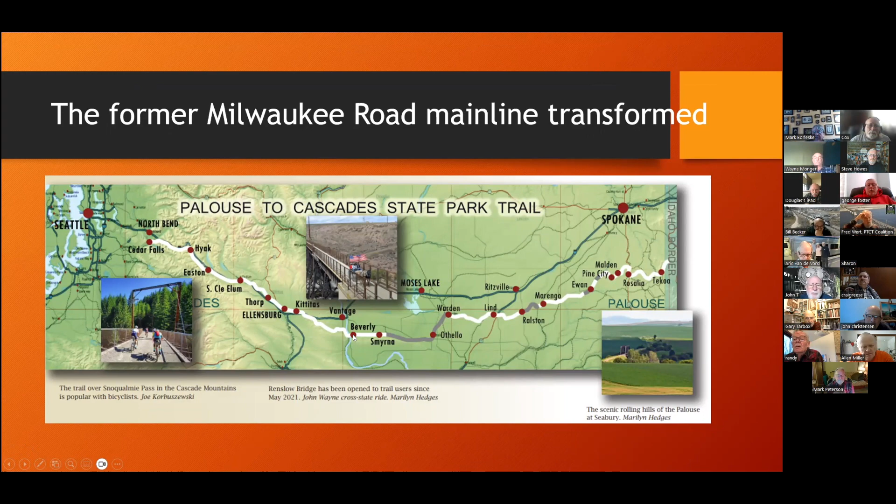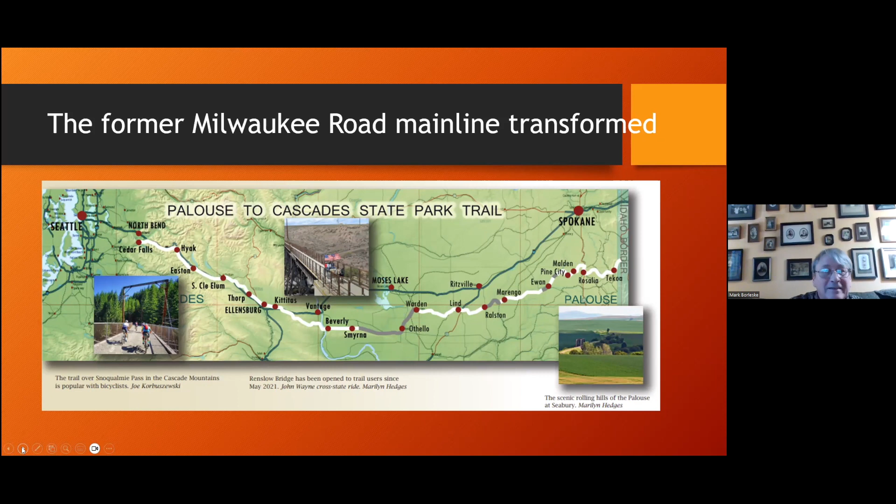Going west to east, the bridges we'll cover are the Renslow Trestle over Interstate 90, the Beverly Bridge over the Columbia River, the Concrete Arch Bridge at Rosalia in eastern Washington, and finally the Tekoa Bridge, or Tekoa Trestle, in Tekoa, Washington. We hope you'll enjoy this tour on Washington's premier cross-state route, the former Milwaukee Road main line.

Our first bridge is Renslow. The unique thing was it was a wooden bridge. It was replaced by a steel bridge shortly after the route was opened. The Milwaukee Road opened through here in 1909 as part of the Pacific Coast Extension, and after this wooden bridge was put in place, it was replaced by steel girders as a permanent bridge that exists today, done in 1910.

As you can see, they're putting girders in under load from the wooden trestle. It's amazing that the railroad was in operation while they were putting these steel girders in. Railroaders often talk about track and time, meaning the maintenance and engineering people getting the right to shut down the track for hours or even a day. This was happening while the railroad was in operation.

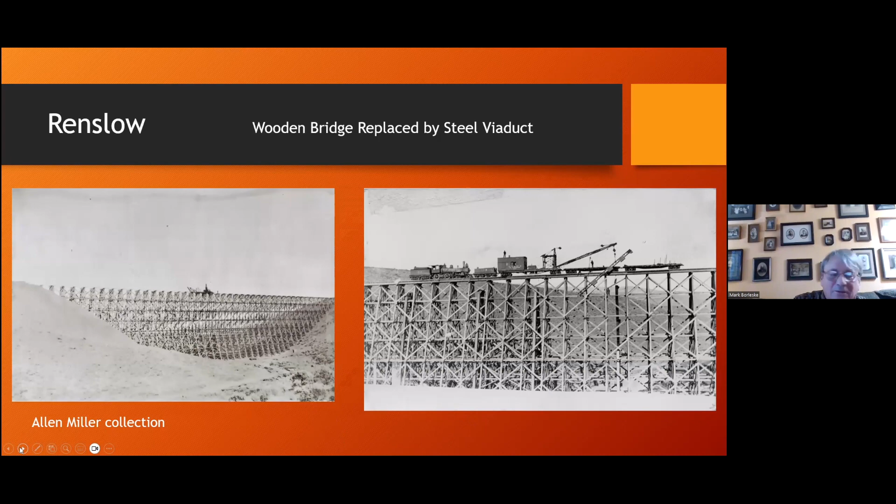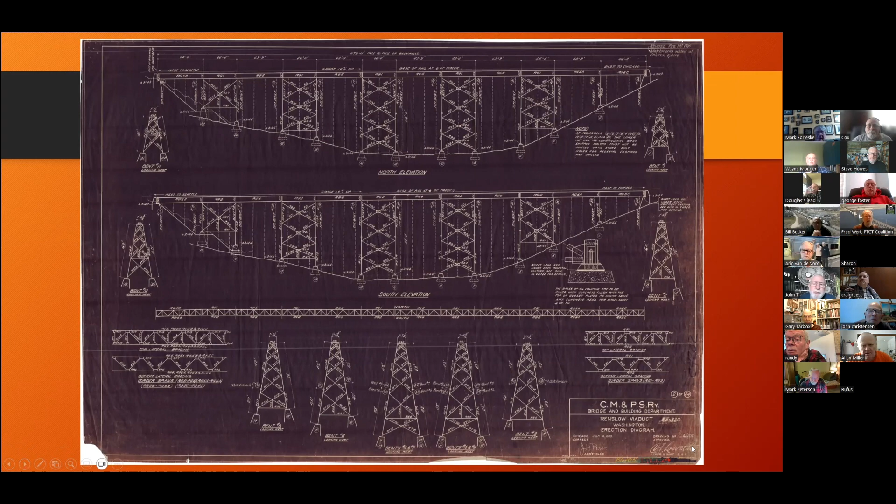This is an example of the plans for this bridge. Intricate steelwork, obviously well engineered and well designed through their engineering department, with a lot of documentation, as you can see in the lower corner. It's the Chicago, Milwaukee, and Puget Sound Railway, a subsidiary of the Milwaukee Road that was in place on the Pacific Coast Extension during the construction era and the early days of the Milwaukee operation.

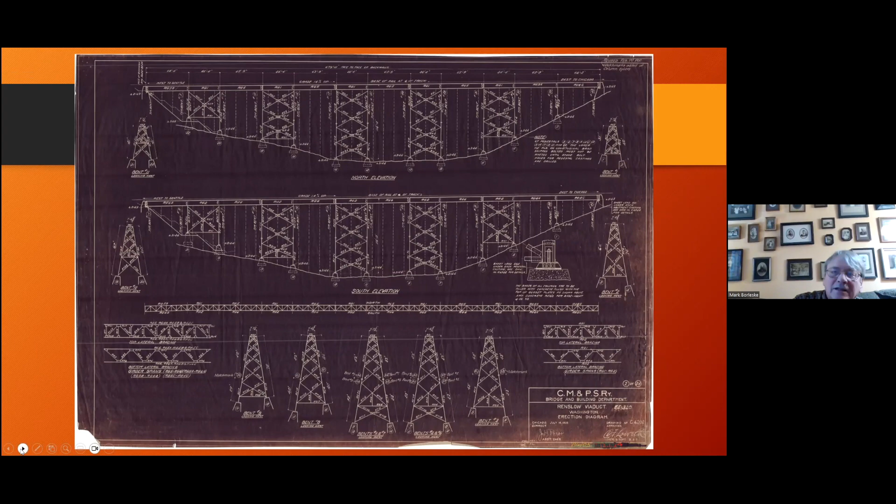The Olympian Hiawatha crossed through this route, and this is just one glimpse from the Ainsworth collection, showing a dome car, a skytop, and a skytop lounge.

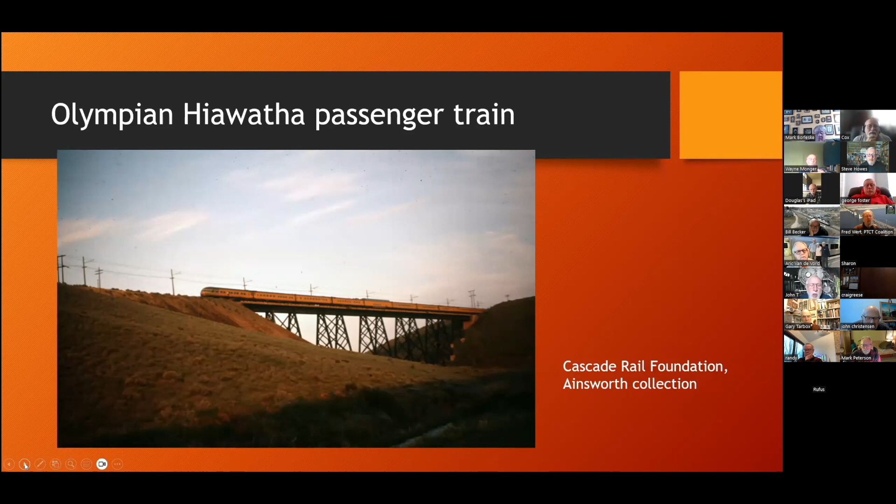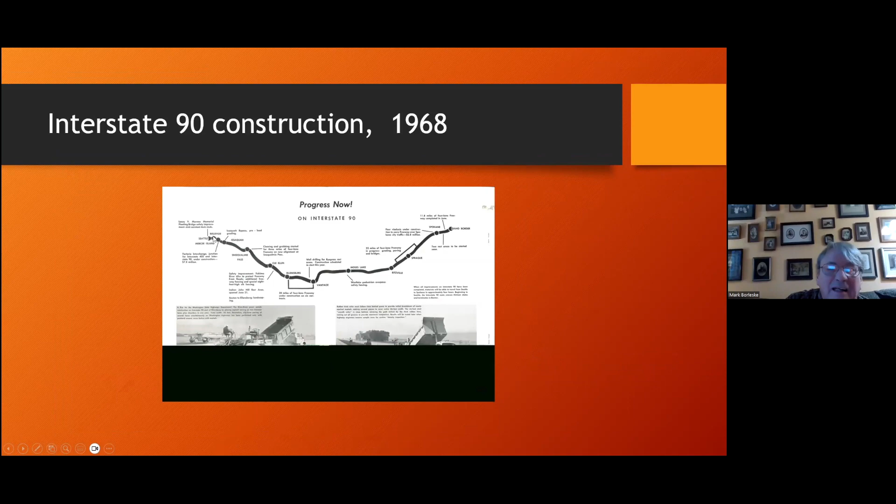In 1968, the interstate was under construction in various places between Seattle and the Idaho border, and right now the Renslow Bridge is in this area between Ellensburg and Vantage.

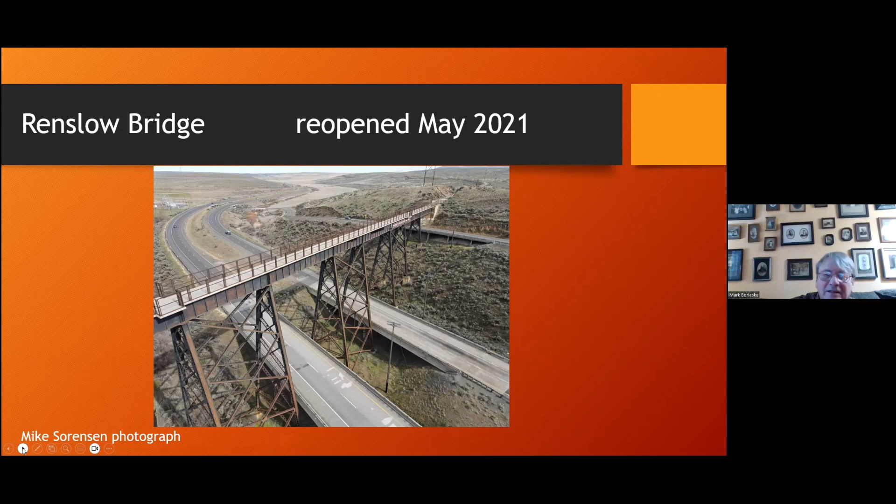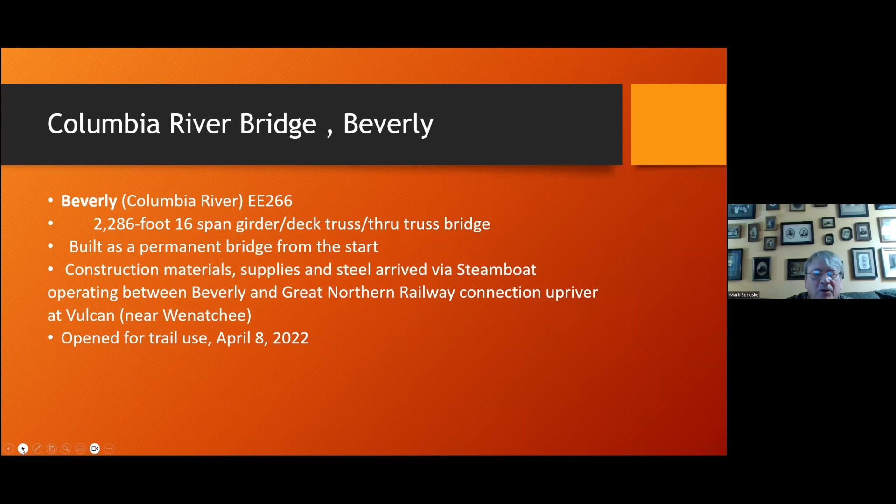This bridge was built well in advance of the railroad railhead reaching this location, because of the years involved in making it, from 1906 to 1909. So material came by steamboat to this location. It came out from, a lot of the steel came from Pennsylvania, and was transferred at a place called Vulcan on the Great Northern Railroad near Rock Island and Wenatchee, their crossing of the Columbia River, and brought down to the site.

The construction was, this was a remote place. Construction was kind of difficult. Weather was a big factor. The winds down the Columbia River at Beverly are pretty legendary, and there were all sorts of factors, both its location and the environmental and weather and climate considerations, making this a difficult place to work. But it got done, and it was just a major engineering feat.

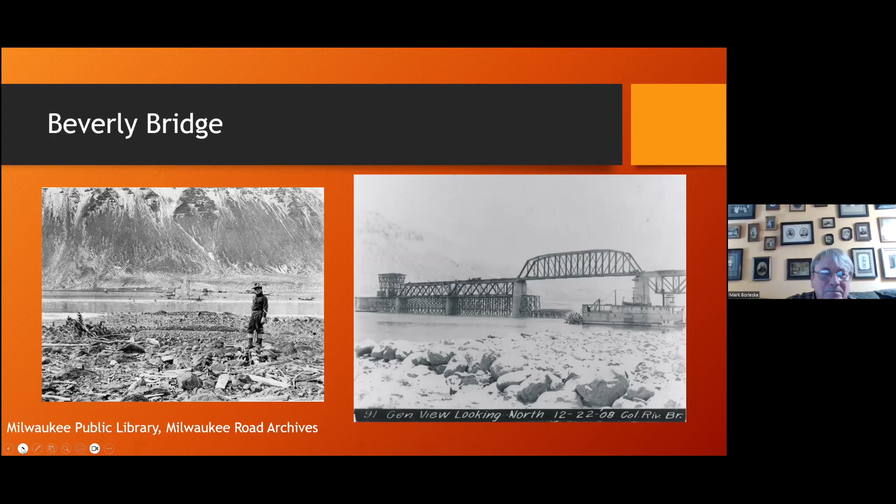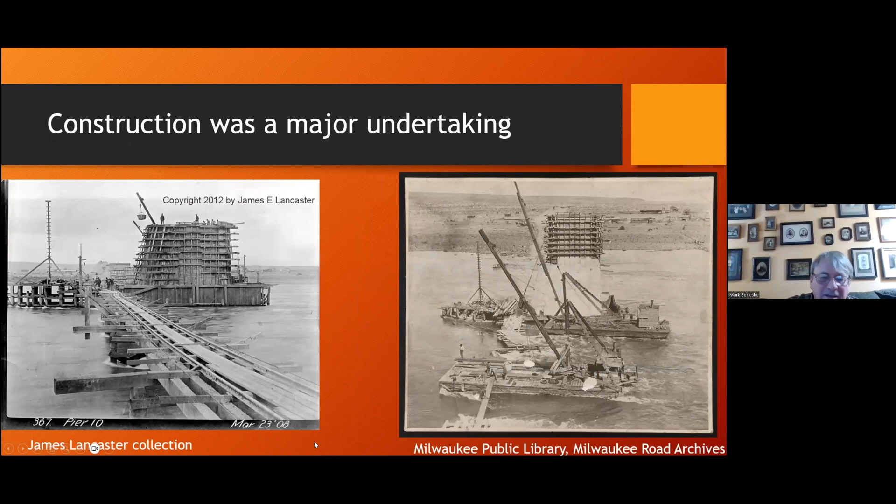The construction of this bridge was done with a lot of false work. The Columbia River's depth was not a major factor, but they used a lot of forms and false work to create coffer dams for pouring concrete and to create the masonry piers.

Once the masonry piers were in place, they did a lot of steel work to span the bridge. This is the one through span apparently on this bridge.

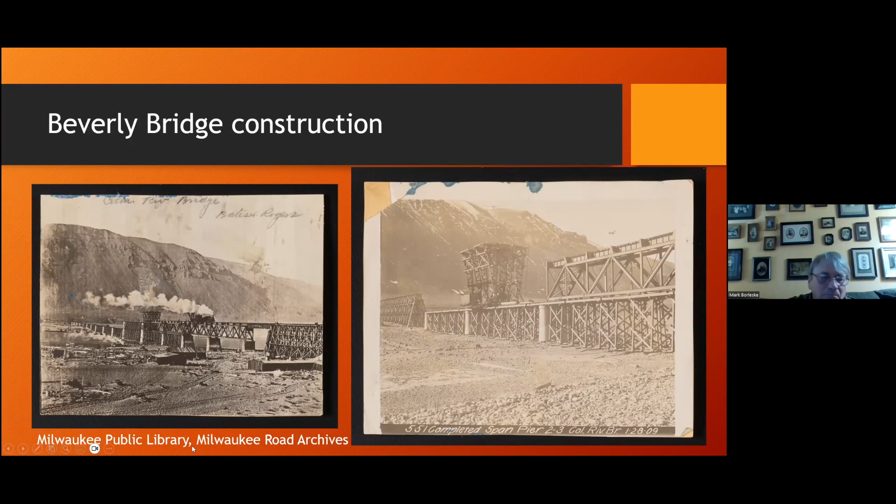This is what we believe is an Asahel Curtis photo, a pastoral scene after the bridge is in place. It's before electrification, so before 1920, and it captures a very pleasant pastoral scene in what is a pretty dramatic location with the Saddle Mountains in the background.

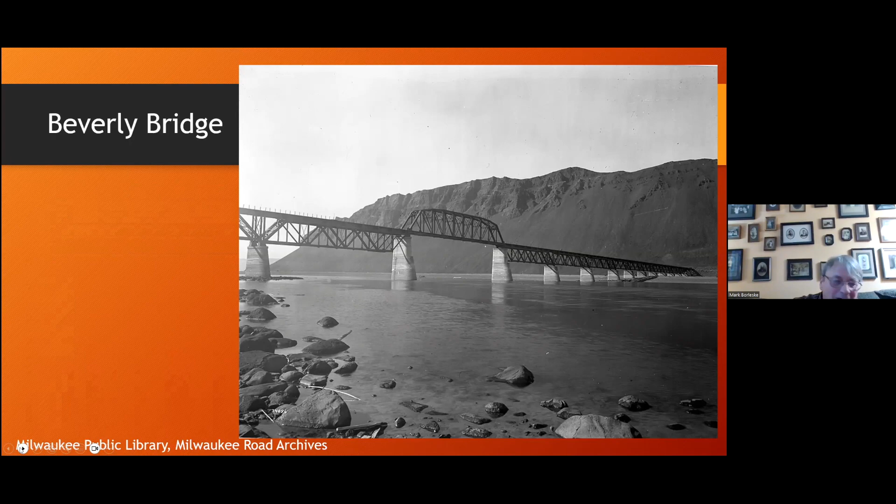The Beverly Bridge, as I mentioned, was electrified from 1920 to the early 70s. Electric trains ran across this bridge between Seattle, Tacoma, and Othello, and it was very efficient and useful for getting across the Saddle Mountain grades.

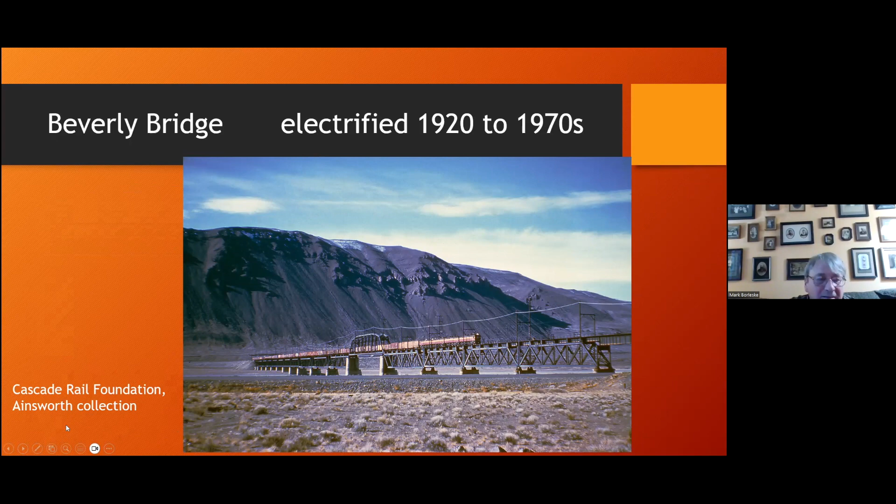One story from Harold Rasmussen, a section foreman who lived at Beverly, was that he saw a train with a piggyback trailer that had blown off a flat car. He called it in to Tacoma to the dispatcher and said a piggyback trailer just blew off the train, and he was chided and told, 'You don't know what you're talking about, that didn't happen.' Then imagine how many hours it takes for the train to go from Beverly to Tacoma.

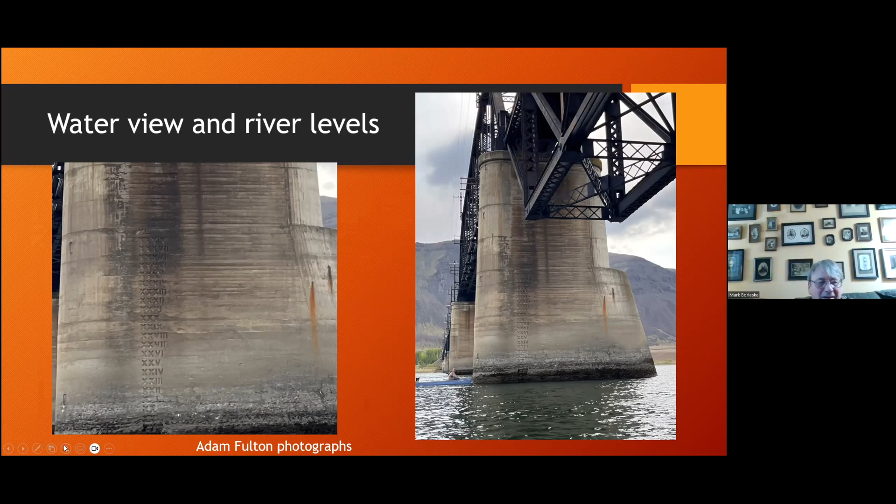This is something that came up during the construction. I didn't realize this was happening, but they actually have watermarks showing the different levels of water embedded in Roman numerals on the concrete piers of the bridge. This was taken by project engineer Adam Fulton during the decking and rehabilitation of the Beverly Bridge.

Beverly served as a helper location for trains up the Saddle Mountains, and it had a small depot. It was a wind-blown little outpost. Some people really thought it was a hardship posting out here, and it was just a small community on the banks of the Columbia River.

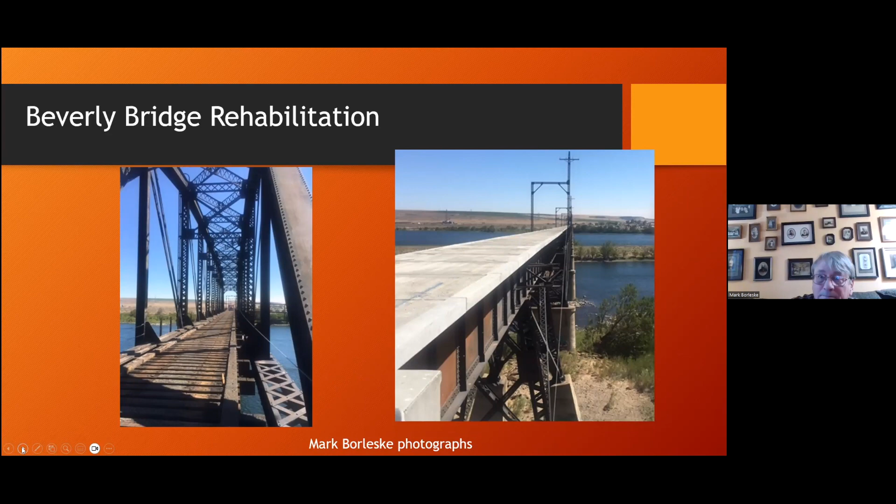Finally, the Beverly Bridge was opened on April 8th, 2022 with great fanfare. We had marching bands and trail users and a number of dignitaries, including Governor Inslee and members of various communities representing this connection of a cross-state route.

The Beverly Bridge continues to serve its purpose as a transportation role, a connector from the east side to the west side, and once again, it's massive engineering, and it continues to serve us. Unfortunately, there's not a railroad on it, but it is absolutely fortunate that we are able to retain this bridge and be able to use it.

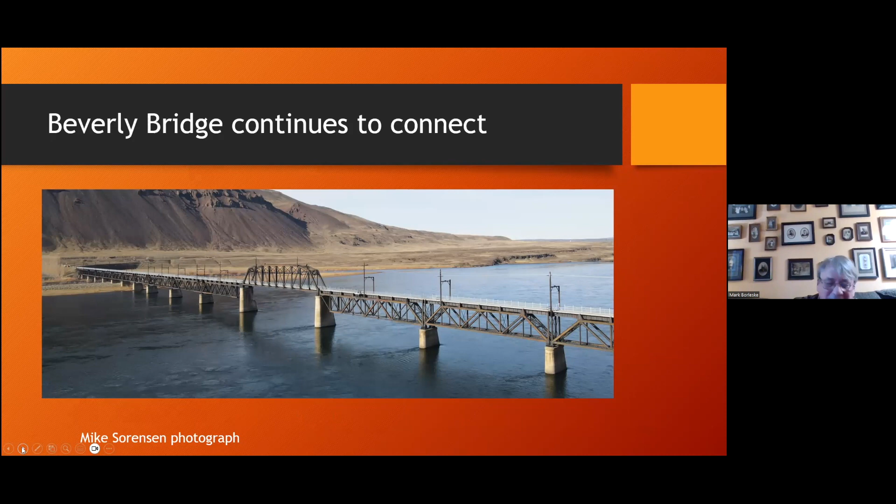Just some kind of personal notes: crossing this bridge is an exhilarating experience. You can cross it from either the Beverly Junction side or the Beverly trailhead.

Next, we travel well over 100 miles and go from Beverly into eastern Washington, across the channeled scablands, into the Palouse. This is the Rosalia Concrete Arch Bridges, which cross a valley carved out by Pine Creek, just south of Rosalia. We cross a former interurban line, as well as an active rail line that was operated by the Northern Pacific in its day, known as the Palouse and Lewiston branch.

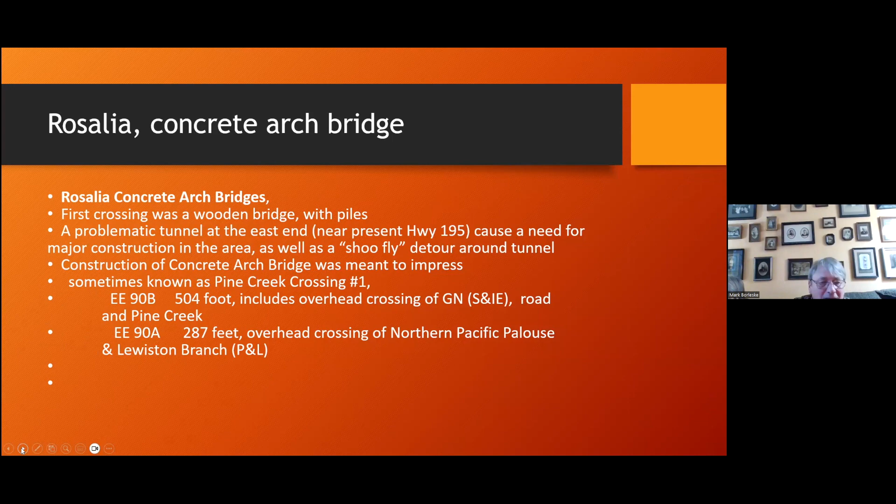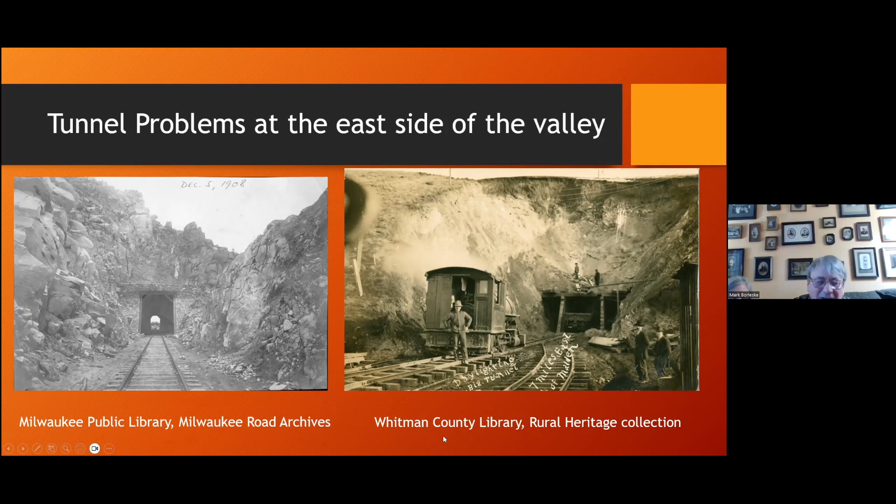The railroad had some difficulty with the tunnel on the east side of the bridge. They went through a hill, and this tunnel was very unstable. So what the Milwaukee Road did is they daylighted this tunnel. But while they were daylighting this tunnel, they also built a shoofly, or a temporary track connection, around the tunnel area, and this is part of the construction that was going on.

During all this tunnel construction, part of the wooden bridge was filled in, and later on they used concrete to complete the bridge as we know it now.

One thing I like about this photo is the fact that the original building of the Milwaukee between 1906 and 1909 used a lot of steam power, heavy equipment, and modern machinery, and yet during the construction of the shoofly and a lot of this work, we see horses in place. This is part of the construction camp during this rehabilitation or daylighting of the tunnel, and there's very much horses in evidence as part of the construction process.

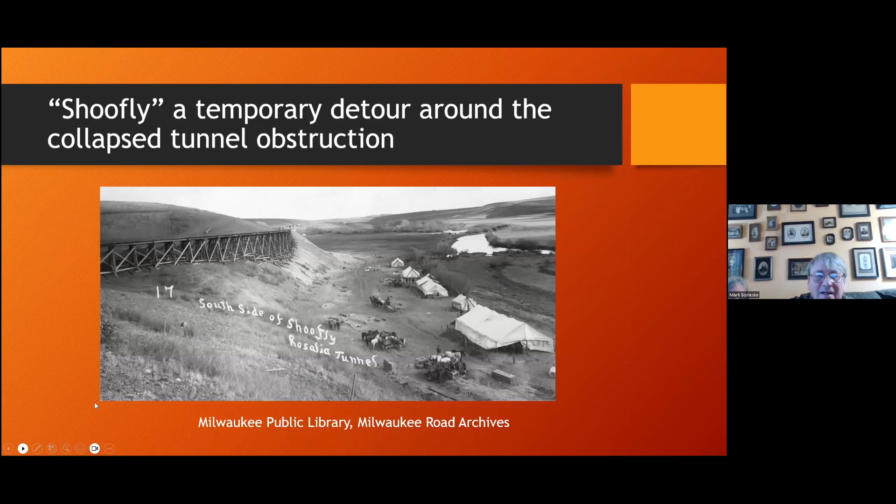With this tunnel daylighting, a lot of fill was dumped off, and the wooden trestle was being replaced by concrete arches. You can see over the course of some progress where the wooden forms were used. Concrete was poured from a tower up above. There was a mixing plant down in the valley, and this was quite a major project.

In the foreground, you see the interurban railroad coming through here, the Spokane and Inland Empire, which ran from Spokane to Colfax, Washington, through Rosalia.

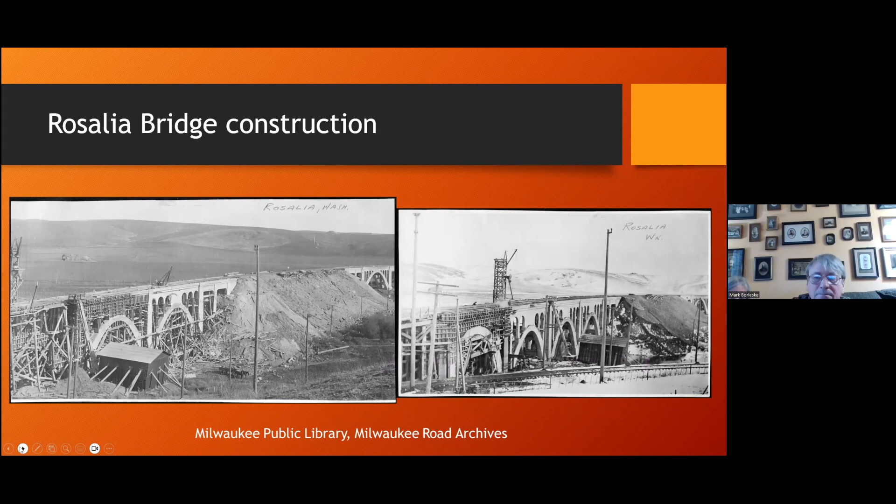Just various pictures during the construction. As you can see, the progress is being made, the span is now being filled out, there's that tower for pouring concrete. It's a wonderful photo showing a steam locomotive crossing over there. This would be an eastbound freight train.

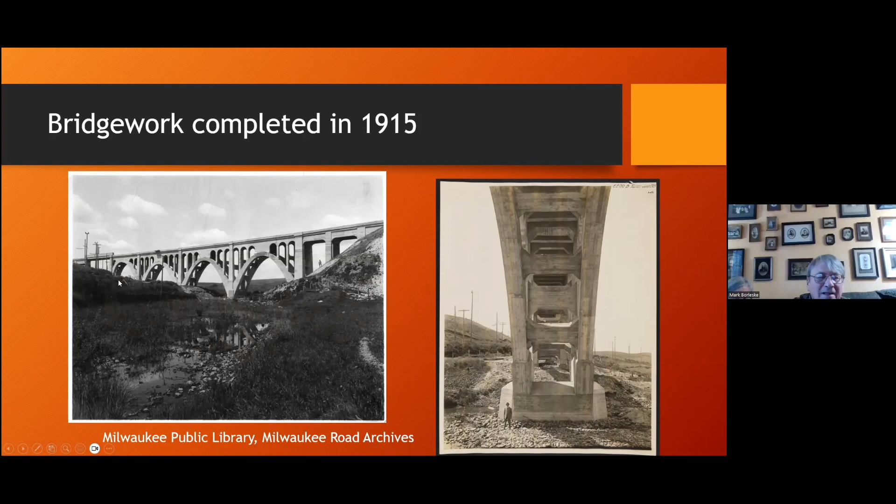This bridge work was completed in 1915 over Pine Creek. Graceful arches. The bridge received recognition for its engineering, and the trade press had articles about the construction of this bridge and the techniques that it used.

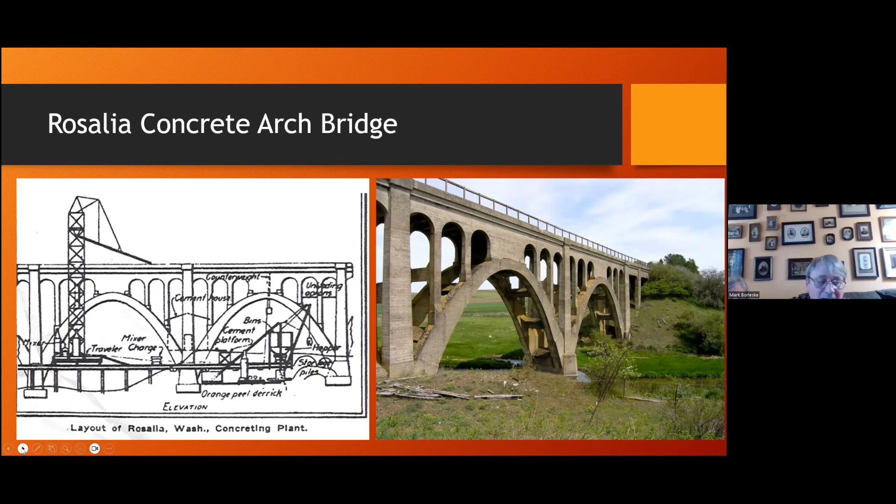This bridge was quite a bit different than the steel bridges you saw on the Milwaukee Road over Snoqualmie Pass, or in the Bitterroot Mountains of Idaho and Montana. There is a concrete arch in Cabin Creek, west of Easton, but this, I believe, is the only bridge of this kind of scale on the Milwaukee Road in the Pacific extension. These are some plans for the arches.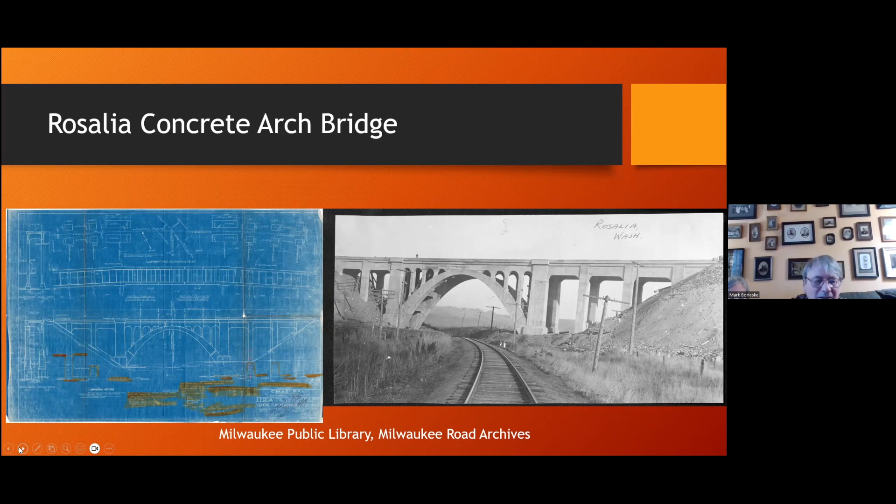This photo here features the Northern Pacific tracks reaching underneath the Milwaukee Road right of way, underneath the bridge, and it served the Milwaukee Road well over the years. We have a photo of an eastbound freight train crossing over the interurban on a deck bridge that was actually a steel bridge that had concrete poured over the top to blend in with the look of the bridge, followed by the arches.

This Klawunder photo shows an eastbound diesel freight with the interurban line, which later became a Great Northern Branch line to Colfax, and there's Pine Creek, and there's the arch for the Northern Pacific, or the P&L branch.

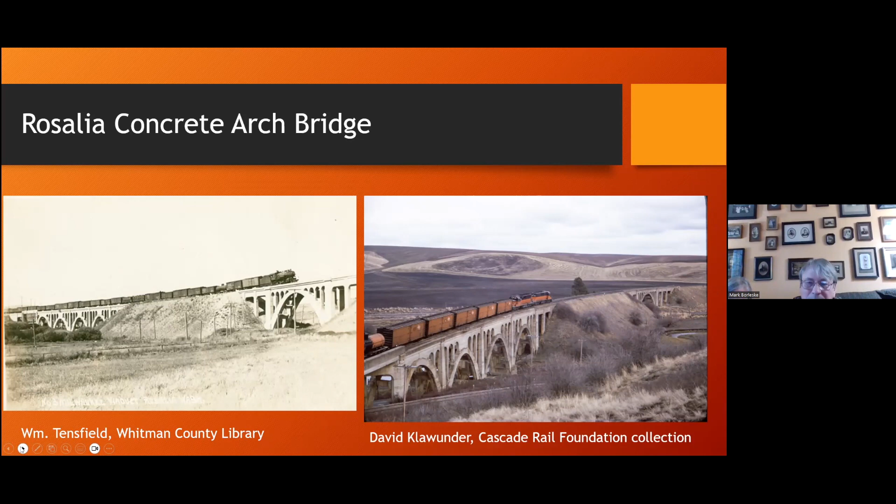And this is the Palouse, the hills of the Palouse, and we know these hills well. They're very productive wheat and grain growing grounds. The Palouse in Whitman County is a very productive wheat growing area.

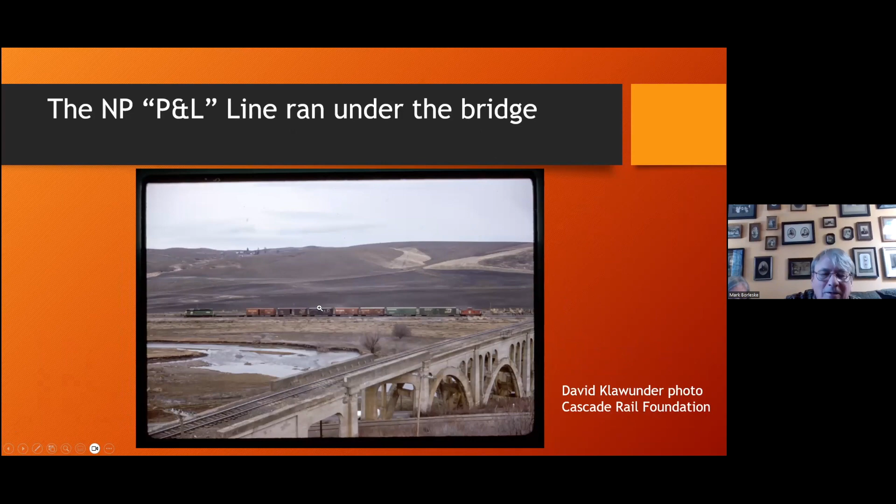We're looking eastbound down the Milwaukee right of way, and this is the cut that was formerly the tunnel that was daylighted. We're seeing a northbound Burlington Northern train on what was the Palouse and Lewiston line. This train would be heading to Spokane. We see these 40-foot boxcars, and in the early days of the Burlington Northern, you could see all the different road names of the components of the Burlington Northern, for example, the Burlington, Northern Pacific, and then some Burlington Northern boxcars with a Great Northern caboose.

So this is Pine Creek in the foreground, heading under what once was the Inland Empire Highway, toward Rosalia and Spokane.

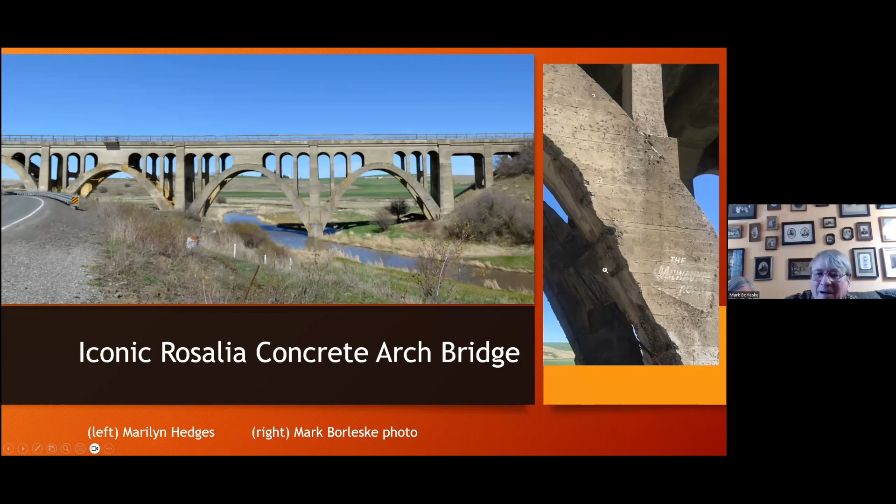So the Rosalia bridge, I would consider this a very iconic bridge, and to this day you can still make out one remnant of the Milwaukee Road. As you can see, there's a bit of the logo still remaining painted on this bridge. The bridge went through some structural repairs, and some of the scaling and work was done to reinforce and help the surface of this bridge, especially over that former Inland Empire Highway. That was completed in 2021.

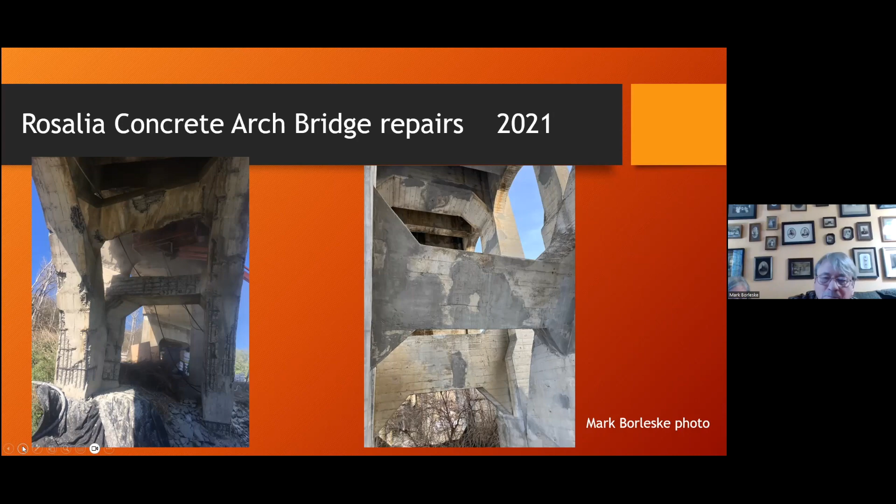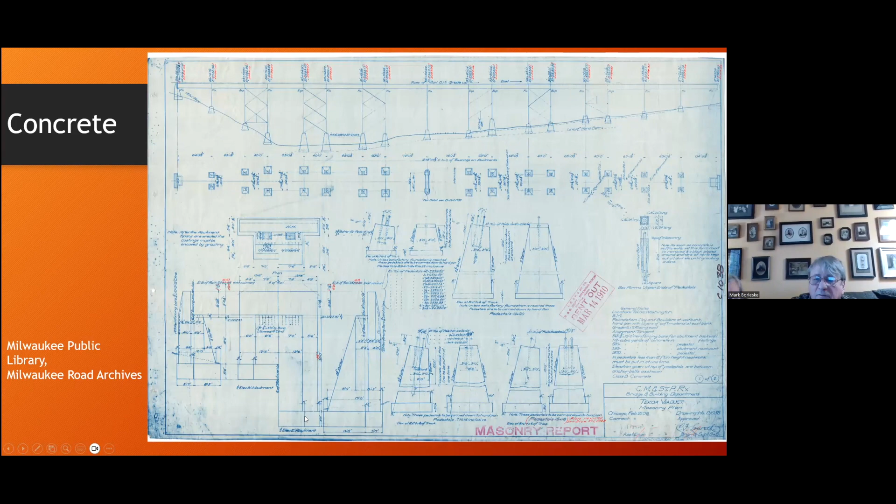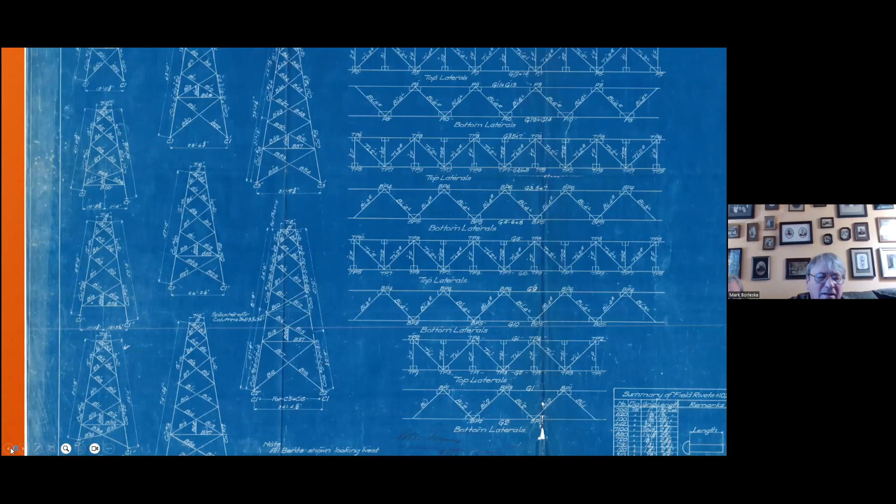These plans were found in the Milwaukee Public Library archives in Milwaukee, Wisconsin, as part of the Milwaukee Road Archives.

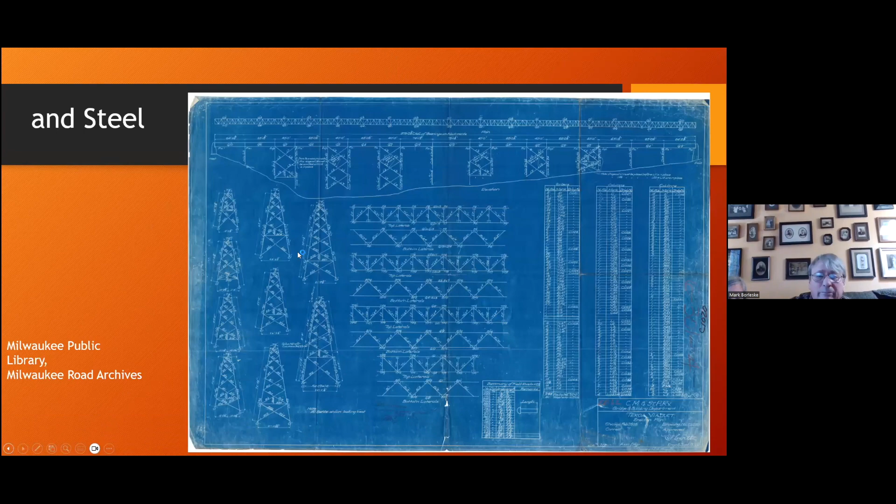The bridge was constructed with a device called a traveler crane. It's similar, actually the same crane used in the Bitterroot Mountains, and this is a display found in the Wallace, Idaho Depot Museum. This is an N-scale replica of how the traveler crane worked. The purpose was to extend the steel work from the portion of the bridge that was completed out, reaching out into the air beyond where the bridge was constructed.

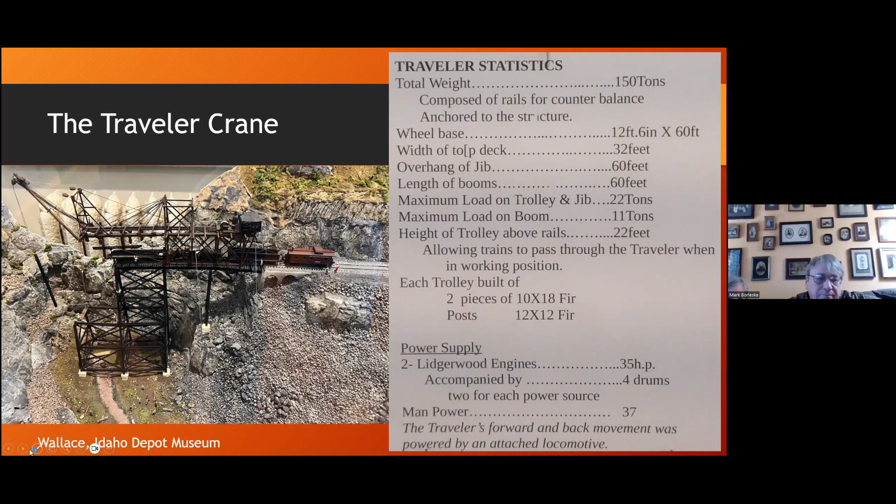As you can see, it has a very long reach. The overhang was 60 feet. So these are pictures of the traveler crane used in the Bitterroots, where you can see this portion of the bridge is load bearing, and then they can extend their steel work beyond.

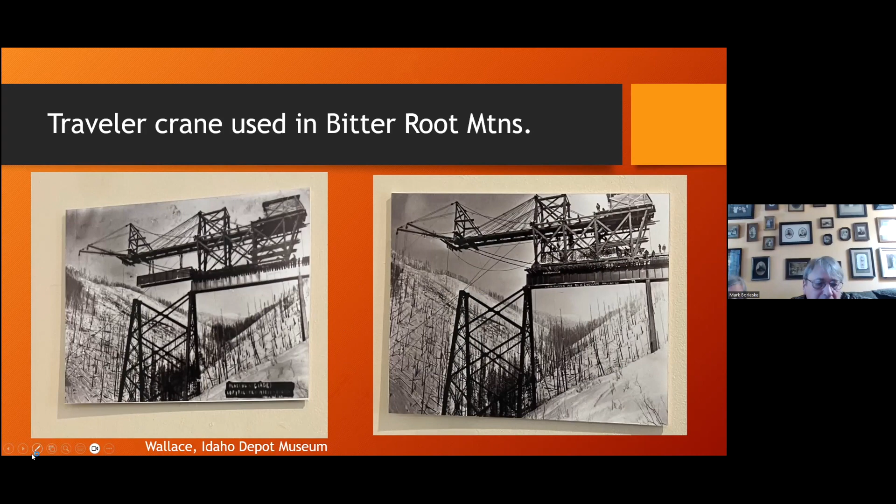And so that same technique was used at Tekoa, where you can see some local folks in their finery coming out and watching a bridge being built. This took place over the summer and fall of 1908. Down below is the Union Pacific Railroad, and the traveler crane was brought in by Union Pacific, hauled up to the west side of the right of way, and so they built this bridge from west to east.

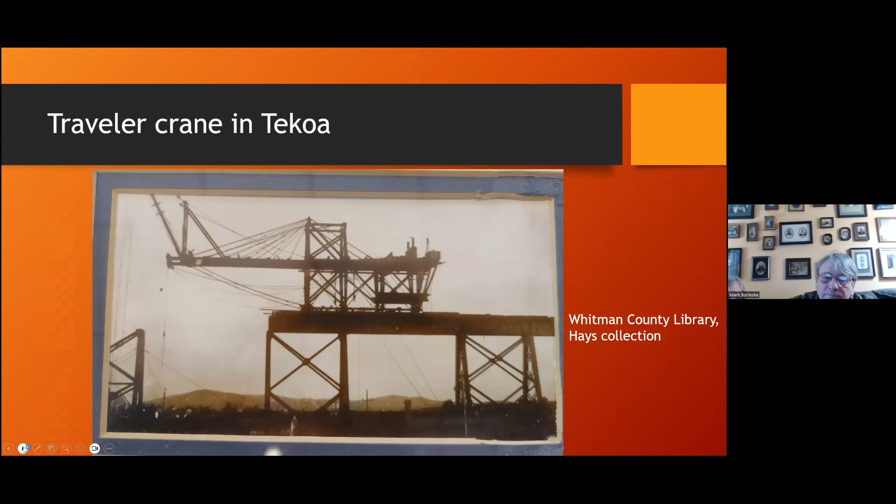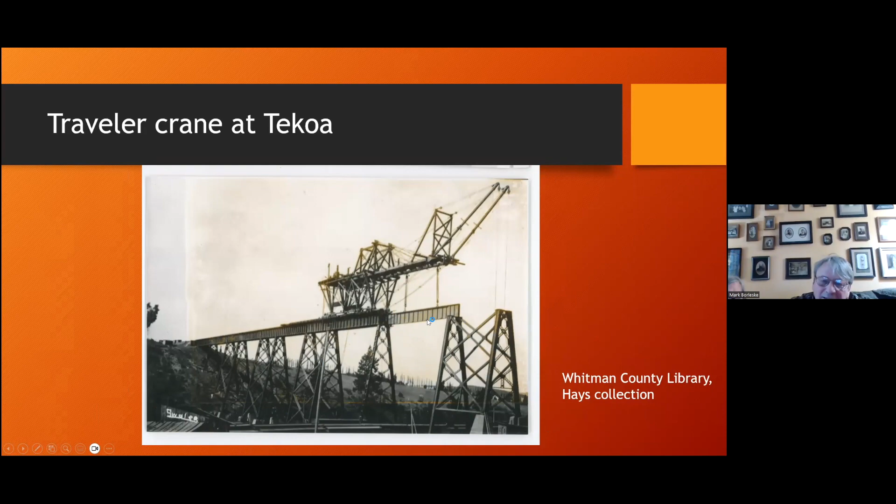As you can see, the concrete piers were set early, and then the vertical supports, and then the deck, two individual deck beams or girders, were set into that.

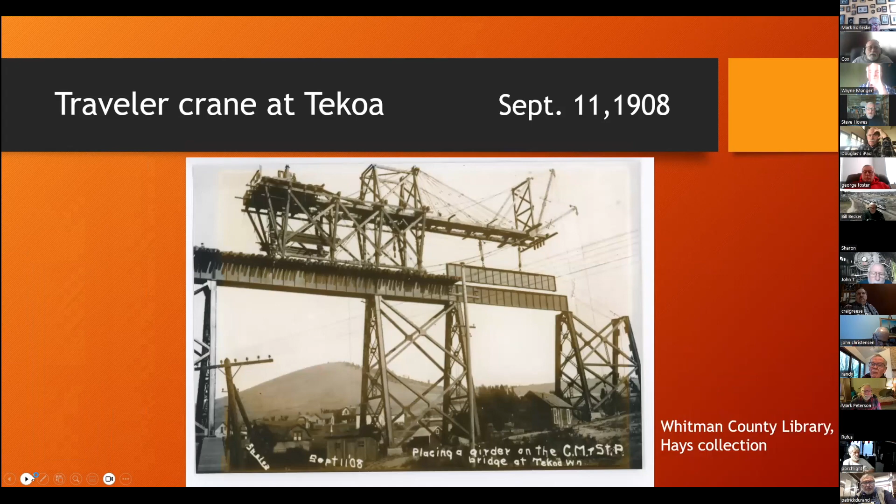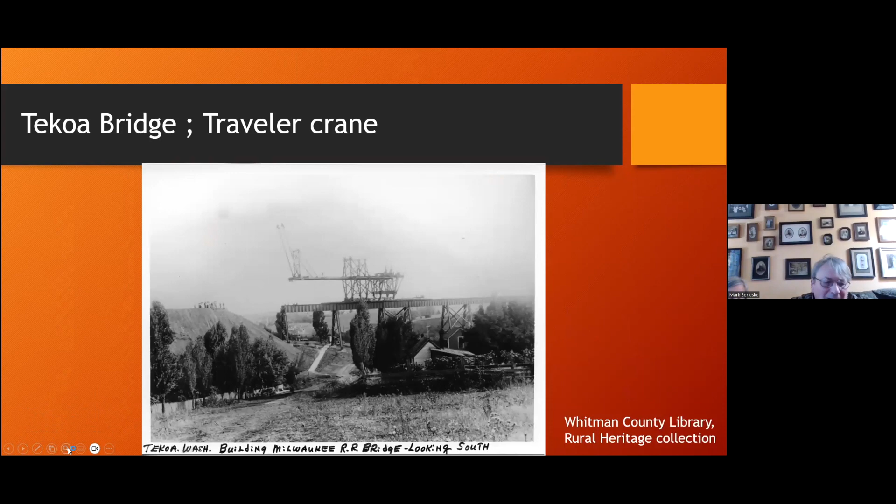This is the last one, one more pair of girders to go, and the bridge will be complete. And the wonderful thing about this is you can see some people standing on that traveler crane, and some people out on the decking there, and the incredible amount of rigging and the scope and size of this machine working its way across.

But one thing that's so special about this is you see these people on the east bank of the right of way. These are just local townspeople, and chances are they're dressed up in their nice finery, coming out to watch a bridge being built. If you notice, there are umbrellas or parasols that the ladies would have to protect their fair skin from the harsh sun. So this is just an interesting moment of the construction where local townspeople would come out and actually see the construction of the railroad.

So this is the completed bridge across the valley. That's the Union Pacific Railroad coming from Spokane into Tekoa, and from Tekoa, the Union Pacific had a small terminal and roundhouse serving the Wallace mining district in Idaho, as well as going south to connect toward their routes to Walla Walla and Pendleton.

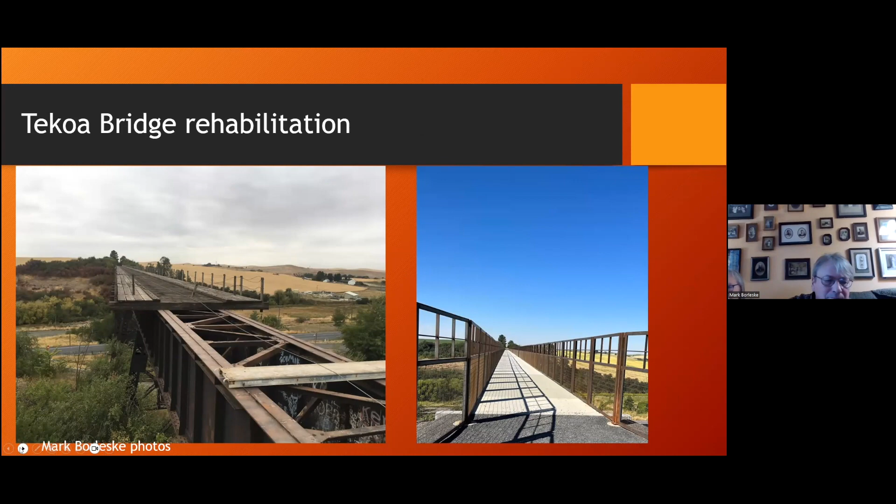This is what the Tekoa Bridge looked like during its decommissioning or abandonment. Part of it had a wooden deck, and part of the wooden deck was removed. So for the rehabilitation, a concrete deck with steel side railings was installed. The rehabilitation was completed, and the bridge was opened in June of 2022.

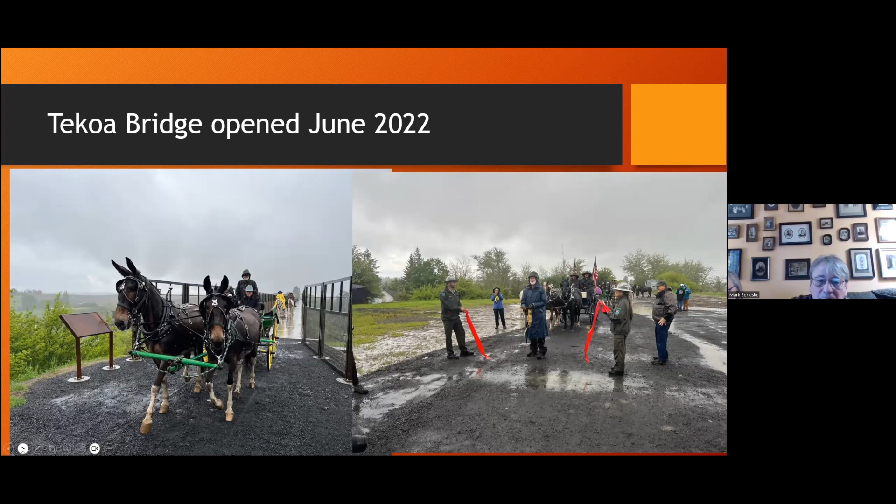And this bridge now serves as a crossing, and Tekoa is a destination for the cross-state ride. Here we can see some horses from the John Wayne Pioneer Wagons and Riders. There are some interpretive signs at Tekoa, and Rob Leachman was generous in allowing us to use his photographs to help interpret this bridge in its later days, as well as a kiosk which was installed by the John Wayne Pioneer Wagons and Riders with support from the Palouse to Cascades Trail Coalition.